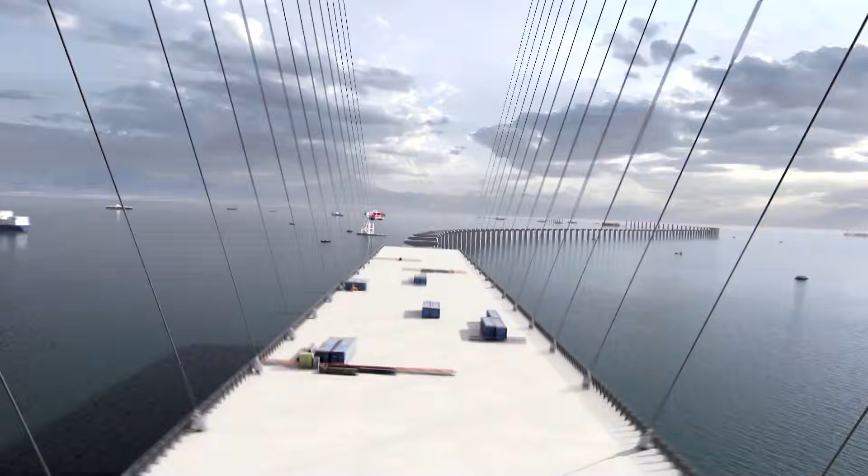In the southeast of China, one of the most audacious construction projects ever undertaken has just been completed, linking the two banks of the estuary to the northwest of Hong Kong by means of a 24-kilometer artificial sea crossing comprising bridges, artificial islands, and a 6.8-kilometer-long immersed tunnel. There are lots of challenges in the project, many bold decisions, and it is so iconic. It has become a landmark.

Begun in 2017 and completed in June 2024, the construction of the Shenzhen Link is an engineering challenge that pushes all known boundaries in this field. The unprecedented bridge span of 1,666 meters anticipates the development of maritime transport. We're offering a very wide navigation channel and a height that will allow the passage of container ships of the future. This titanic project has given this prosperous Chinese region an 8-lane highway, cutting travel time across the delta to 30 minutes, whereas in the past, it took 2 hours to drive around it.

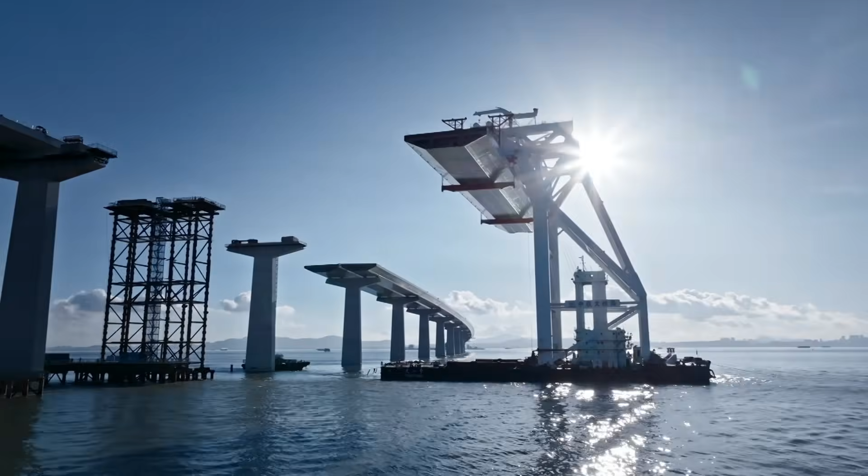What impresses me most about this project is that despite the cost it may represent, there's a structural unity from one end of the project to the other that is spectacular, magnificent, and successful. Original and exceptional designs, a quest for performance and durability, perilous transportation and assembly in a hostile environment, the construction of the Shenzhen Link has proven the skills of its builders, notching up world records in this engineering sector. So we take one of the longest immersed tunnels, one of the longest suspension bridges, and we combine that into a massive project that in itself makes it a huge challenge.

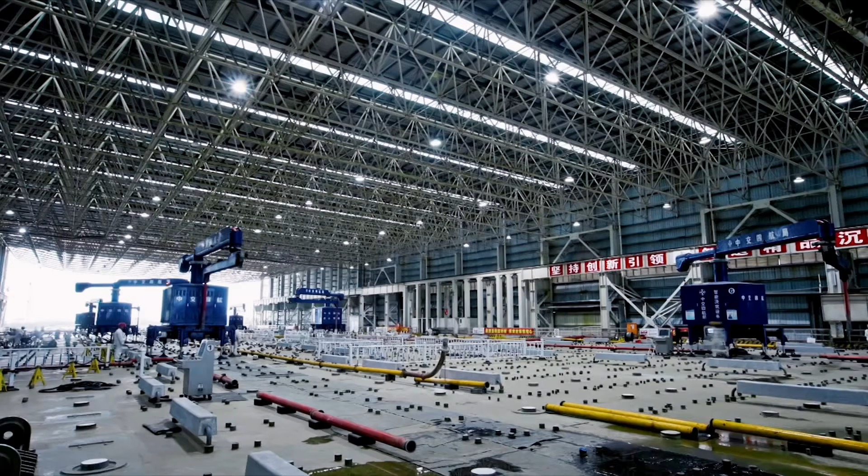For this project, the Chinese have continued to innovate, building new types of tugboats and floating cranes, coming up with designs and materials that are even more resistant to the vagaries of the weather, and building revolutionary, fully automated factories. Really, the boundaries of technology have been pushed. The high degree of automation and prefabrication, I think, will also set new standards. It is time to get on board for a spectacular story. The story of an incredible construction journey that has reshaped the landscape and the brilliant future of the Greater Bay Area and brought sea link construction into a new era.

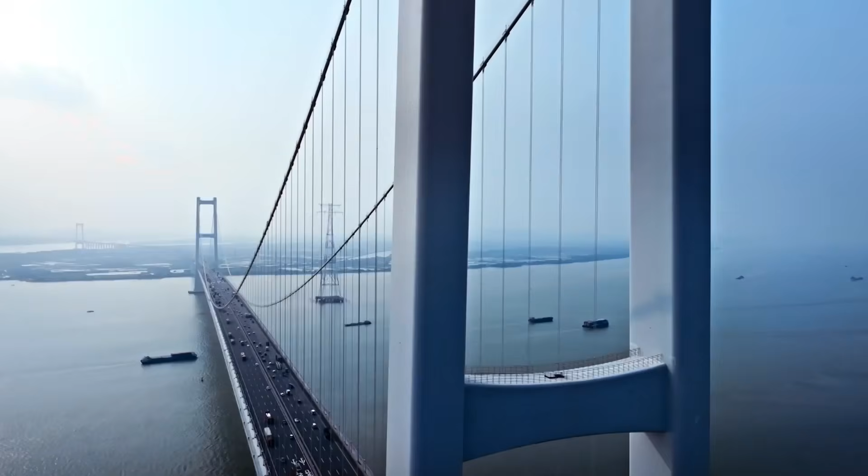The South China Sea is a large corridor through which a large part of the world's maritime trade passes. To the northwest of Hong Kong, the region bordering the Pearl River estuary has become one of the most dynamic areas in China. Most of the cutting-edge industries are grouped there, and their annual economic output is close to 1,800 billion euros, 20 times the turnover of the Silicon Valley in America. This area, known as the Guangdong-Hong Kong-Macau Greater Bay Area, has more than 80 million inhabitants and already has an extraordinary transport network made up of 4,900 kilometers of highway and 2,500 kilometers of railways, a combined distance that would connect Paris to Beijing. Added to this are 5 international airports and 3 of the largest commercial ports in the world. However, demand continues to grow for road infrastructure to enable faster crossing from one bank to the other.

This is how, in 2017, a new crazy project was initiated, connecting the cities of Shenzhen and Zhongshan by spanning the estuary using a bridge and an underwater tunnel in order to reduce the travel time between these two constantly developing cities. Thanks to this new maritime link, the journey will be 4 times faster than going around the bay by the north. Such a project, of course, can only be justified by very strong socio-economic reasons, and it was certainly supported by a strong political will to build an exceptional structure.

When the link is opened, road traffic will exceed 100,000 vehicles per day. It will be two-way and on 8 traffic lanes, which makes it one of the most ambitious challenges of all trans-maritime projects in the world. But I think in terms of ambition, it was really the time frame to construct a link of that scale, 24 kilometers, within the given time frame of 7-8 years. That's a big challenge. And building such an edifice in an aerial and aquatic environment in perpetual motion was another major challenge.

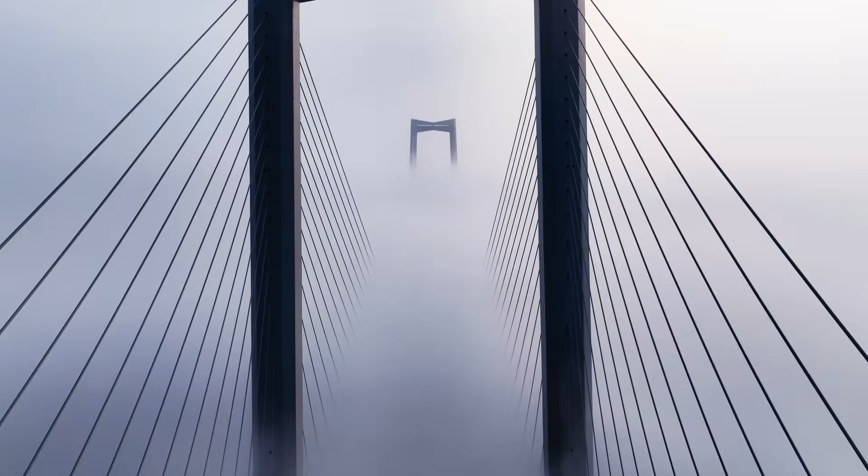From the very beginning of the project, the specialists therefore focused on analyzing and understanding the natural elements present in the estuary, the hydrometry, the river and sea currents, and of course, the winds. The typhoon winds are a major issue in these areas, so we do quite extensive testing of the structure. We actually build a model, and then we expose it to different winds and different directions to make sure that it's stable under these severe conditions. These wind tunnel tests reproduce the typhoons that regularly pass through the Greater Bay Area. The engineers therefore tested several designs and found out which is most appropriate.

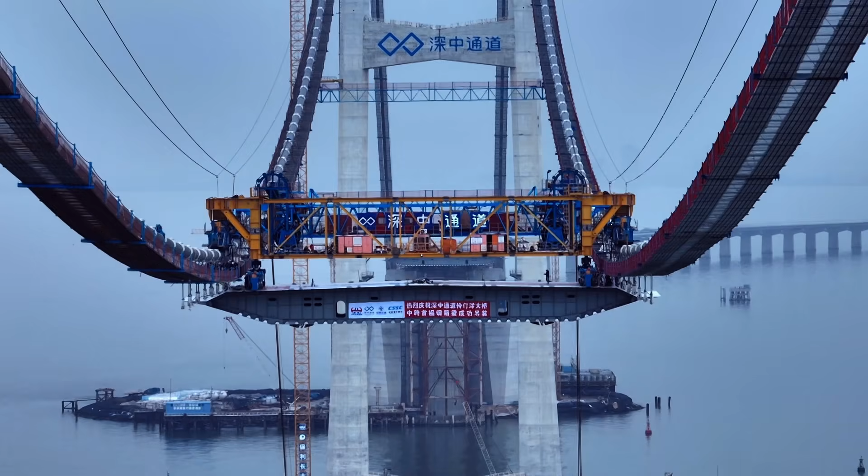It's about forming the structure in a way that the wind can flow around it to make as little resistance as possible. And we can see here that for the structure of the suspension bridge, the section was fitted with a fairly pointed nose, which is quite rare in this type of structure, and which, like an airplane wing, will allow the air to flow around the structure as smoothly as possible.

This tapered shape has significantly optimized the aerodynamics of the bridge, allowing it to withstand typhoons with winds exceeding 300 kilometers per hour. The other major challenge was the design of the submerged elements, because the Lingding-Yang, the central channel of the estuary, has a weak ocean current. The installation of a bridge tunnel over its entire width should therefore, under no circumstances, reduce this current further, at the risk of seeing sediment deposits accumulate and hindering its natural functioning.

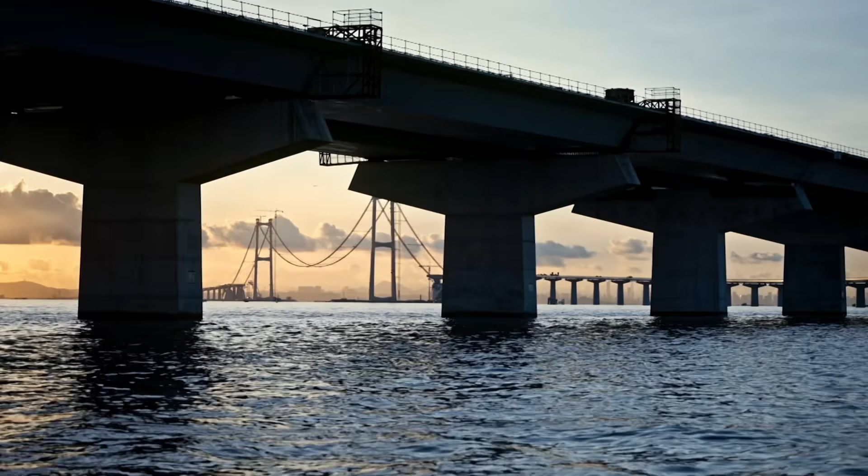Its S-shaped design is therefore not a coincidence. The reason for the winding route is mainly due to the need to design the bridge perpendicular to the water flow, which is more conducive to flood control and tidal regulation. By imagining the route of the bridge perpendicular to the direction of water flow, the obstruction generated by the bridge piers and artificial islands can be considerably minimized. And to further reduce this impact, thought has also been given to the design and shape of these elements.

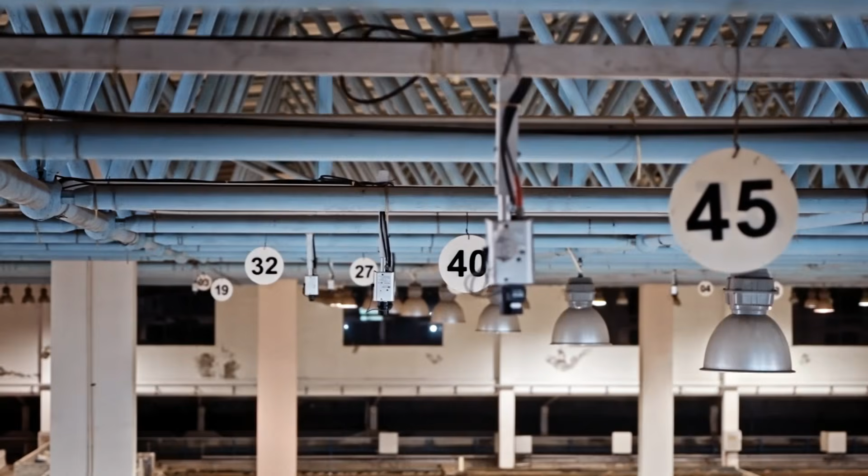To do this, Chinese engineers designed a scale model of the estuary, reconstructing the relief and currents of the Pearl River estuary over 100,000 square meters. For 2 years using models, the engineers were able to carry out hundreds of experiments like this one. This little piece of plastic is a tracer particle. We're using 40,000 of them in this experiment, and above me are 282 cameras that allow us to follow the trajectory and movement of the particles, and to study the hydrodynamic impact of the Shenzhen Bridge on the Lingding Channel.

These multiple experiments have helped to optimize the design of the bridge piers and the 137,000 square meter artificial island planned to be built right in the middle of the estuary. It was very much about coming up with shapes that are streamlined so that they will naturally have as little blockage as possible. And then you would also notice that in certain parts of the structure, there's only one pier. So even though there are two girders, they're resting on one pier instead of having two pier shafts. And that also helps to limit the water blockage.

For the West Artificial Island, which will be the entrance to the underwater tunnel, a diamond shape with curved edges was chosen. This design transforms the ocean into a sky, in which an elegant kite is floating, pointing east towards the rising sun. The concept of a kite attached to a string, rising towards the sun and chasing the light is like a poem or a painting, imbued with a great sense of harmony. This concept embodies what we believe to be an elegant masterpiece of engineering.

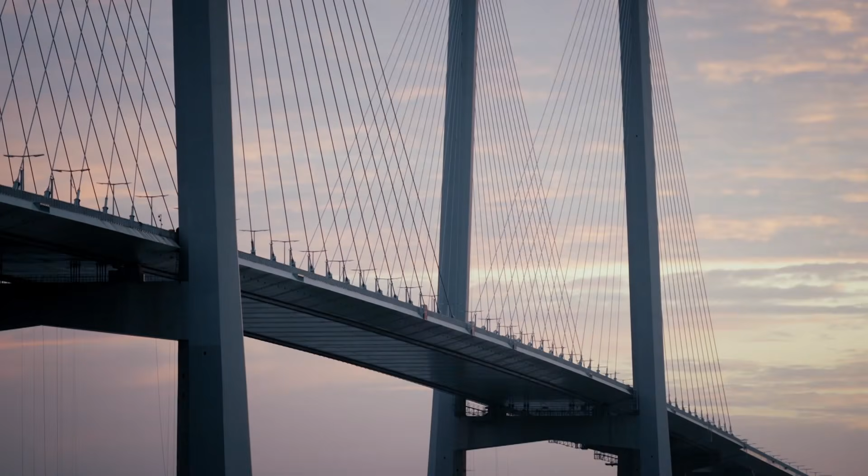Kite, it's linked to Chinese culture, but it's also, I think, a toy that a lot of people are familiar with. So in a way, it's also a universal language. There was a lot of effort put into the fact that it had to be one flow, even though it was an island, a bridge, and a tunnel. So it's more than just a transport element, but also an aesthetically pleasing element in the context where it's placed.

The first works in the estuary began in May 2017. The countdown had begun because the Chinese engineers set themselves the goal of completing this 24-kilometer maritime link in just 7 years. 7 years to construct a link of this scale is certainly ambitious and a huge challenge. But on the other hand, Chinese are very good at implementing at speed.

Within less than 2,500 days, they will have to build a cable-stayed bridge, simple bridges called approach bridges, a suspension bridge, 2 artificial islands, and an underwater tunnel almost 7 kilometers long due to the proximity of Shenzhen International Airport, whose intense air traffic prohibits the construction of any high buildings. A titanic challenge that must also combine lightness and long-lasting performance. Lightness and durability are not incompatible. They are even complementary, as long as you choose the right materials in the right place.

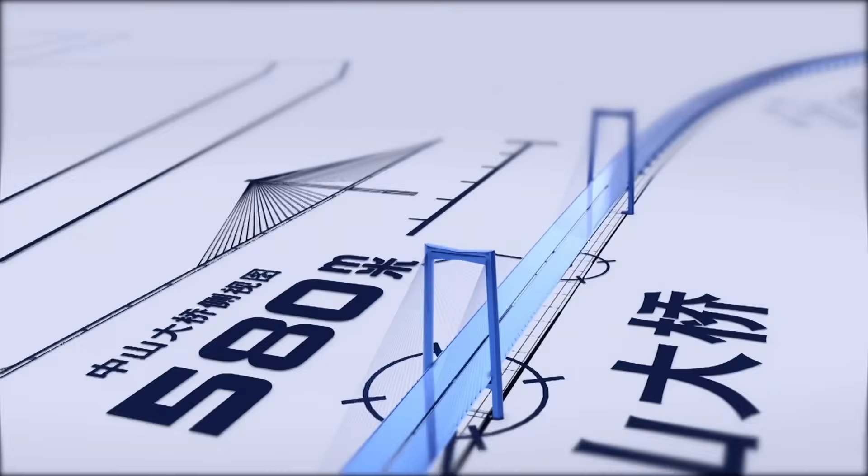One of the approach bridges, located between the cable-stayed bridge and the suspension bridge, is 13 kilometers long. It is supported by more than 120 concrete piers, firmly anchored in the estuary and spaced as far apart as possible so as not to obstruct the current. As a result, the engineers had to design long deck spans that were both rigid and lightweight. And to do this, they had to use the most suitable material, steel.

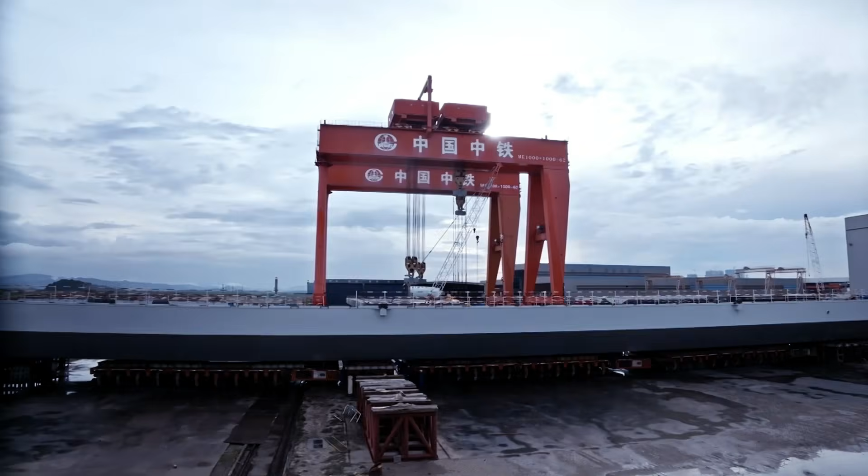In just 2 years, nearly 100,000 tons of steel box girders were manufactured in this ultra-modern factory built specifically for the project. From cutting the plates to welding, everything is automated. I think you can rely on a much better quality with an automated process, and you can also obtain speed and repetitiveness to a higher degree.

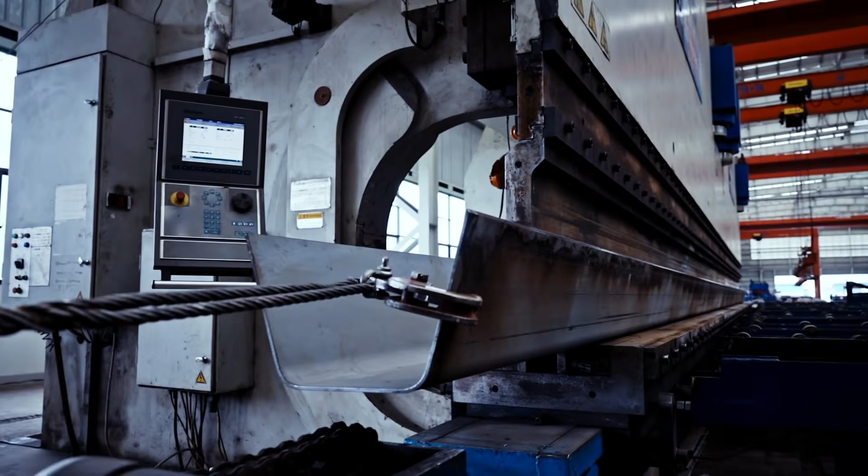The box girders, which will have to support the weight of the cars, attain their rigidity thanks to the U-shaped metal reinforcements. However, the structure remains very open, which keeps it light. For this project, the assembly method was enhanced with a technological innovation consisting of welding these reinforcements from the inside in a space barely larger than a volleyball, a world first made possible thanks to this new robot.

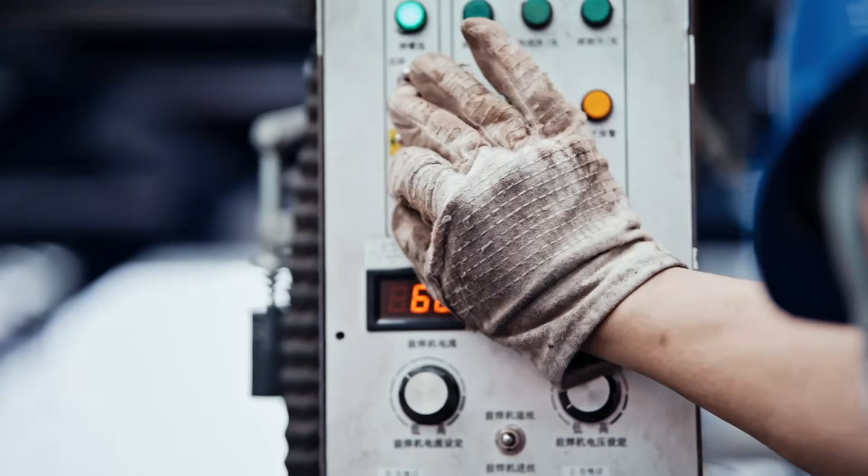Traditionally, it has only been possible to weld from the outside, so as you can imagine, it leaves the potential for a little gap on the inside. It will ultimately mean that the material will break in fatigue, as we call it. By welding from the inside, the quality of that little detail is actually improved quite a lot. So this technology is definitely an innovation and a leap forward that we will take a lot of inspiration from in other projects.

Once assembled, each box girder is more than 100 meters long and weighs 1,500 tons. But once it leaves the factory, how can this imposing structure be transported? And how will it be hoisted onto the bridge piers right in the middle of the estuary? The answer is called Sky One, a crane ship 84 meters high with the largest lifting capacity in Asia, because it can lift up to 3,600 tons, the weight of 80 semi-trailers.

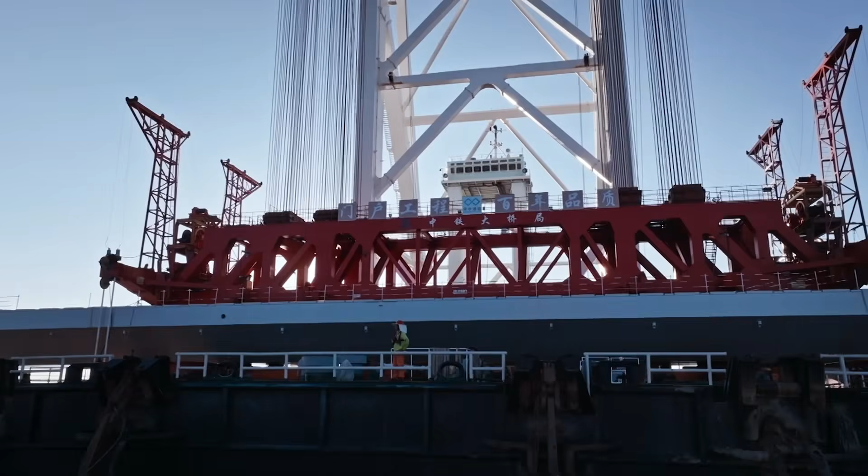Sky One should cross the Lingdingyang Canal in 20 minutes. I'll report back to you. Okay, understood. The Sky One is a ship that can both transport elements weighing several thousand tons and put them in place without any problem, with the required precision.

In record time, this floating forklift reaches the steel box girder's final location. The pilots have to demonstrate great dexterity as they approach the bridge. If the wind and the current are going in the same direction, the ship is in great danger. It could very easily drift out of the canal and hit the bridge. Now that all the piers and the first decks have been installed, any collision would be extremely dangerous.

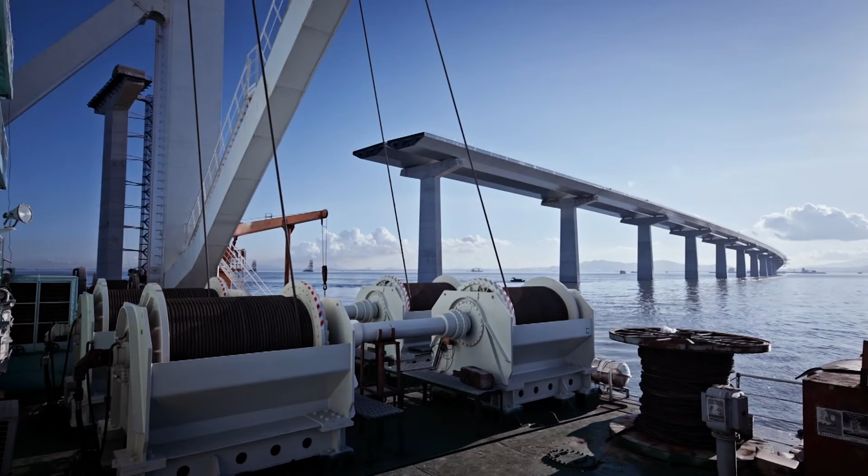The Sky One can lift the box girder up smoothly to about 60 meters. The problem is that at this point, the bridge deck peaks at 61 meters above sea level. To successfully complete this assembly, the engineers are counting on their most formidable enemy, which then becomes their best ally, the tide. In the middle and at the beginning of each month, we will take advantage of the maximum tide level to install the highest girders.

At high tide, the Sky One goes into action. Despite the wind and waves that disrupt the maneuver, the box girder comes to rest, slowly but surely, on the bridge piers. It will then be welded to the previous elements. In less than 2 years, this crane ship will have completed the assembly of all the box girders of the main approach bridge of the Shenzhen Link. An amazing feat of efficiency and speed.

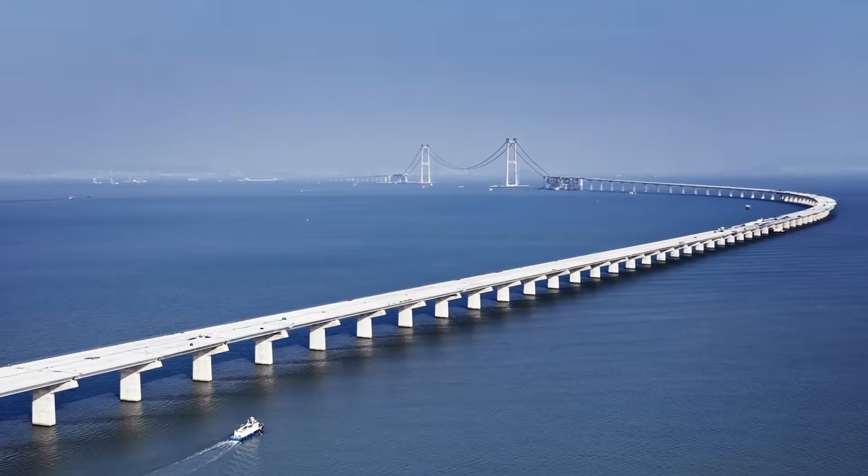Generally speaking, planning is very important for builders around the world. As far as the Chinese are concerned, it's certain that there's a question of honor on top of it all. Everything is excessive in this cross-sea highway project. The Shenzhen Zhongshan suspension bridge is a perfect example. It is planned to be the highest in the world, reaching 76.5 meters above the water, the equivalent of a 26-story building or 2 ocean liners like the Titanic stacked on top of each other.

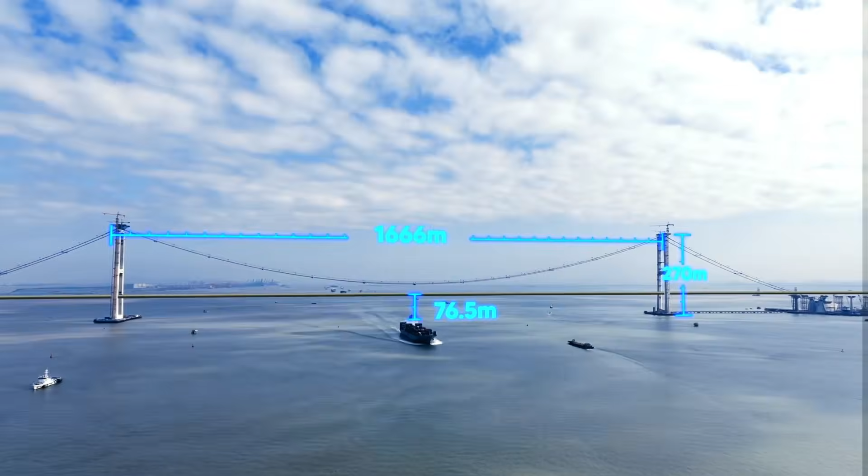The bridge will also be the world's largest span steel box girder suspension bridge in the sea, measuring 1,666 meters long. But these extraordinary dimensions are not just the whims of an engineer. The Shenzhen Link is located in one of the busiest areas for global maritime trade and is designed to last a minimum of 100 years.

In view of the development of maritime transport, with a width of 1,666 meters, we offer a very wide navigation channel. And why did we choose this height under the deck? Because we studied the trend of ship development over the next 50 years, and we've planned enough clearance heights to allow the container ships of the future to pass through.

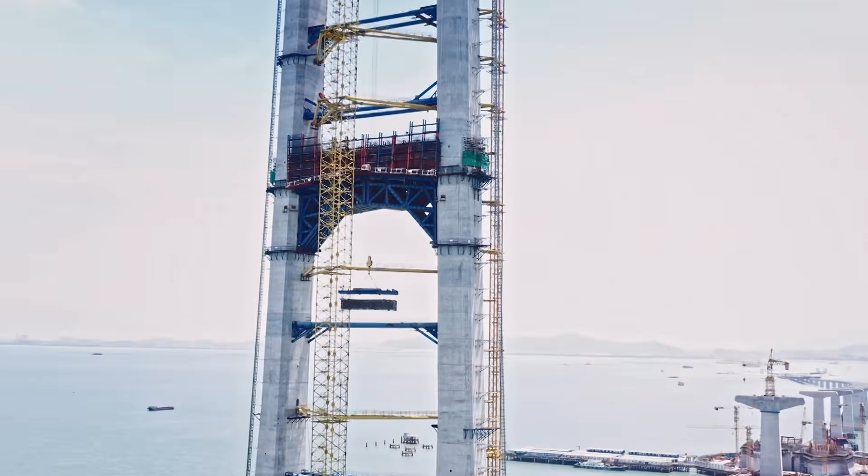To achieve this amount of clearance under the suspension bridge, the main towers that support the cables must be 270 meters high. A new challenge for the builders, who have once again custom-developed a construction machine capable of achieving this feat. Directly installed on-site, this circular micro-factory built the towers, floor after floor, rising with them throughout the process. For each tower, 48 operations were enough to pour 50,000 cubic meters of concrete onto 7,400 tons of prefabricated steel reinforcements. This is how the 270-meter towers were completed in barely a year of work.

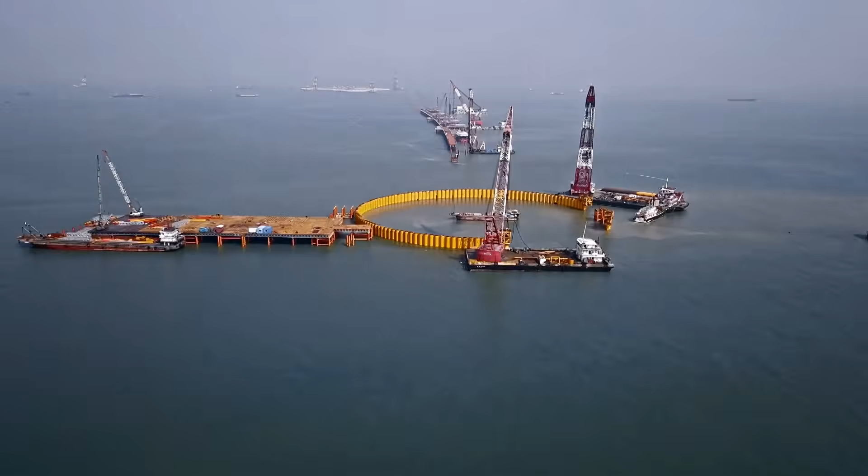At the same time, 580 meters from each of the towers, 2 underwater anchors made of reinforced concrete were built to accommodate the ends of the 2 cables that will support the load of the bridge. In this case, they weigh 1 million tons, and that doesn't surprise me at all, since they have to withstand this phenomenal force generated by the cable. These are real buildings. In fact, they're the most important buildings in the bridge. Without the anchor blocks, there's no suspension bridge.

Even before the weight of the vehicles is added, the body of the suspension bridge alone will weigh 85,000 tons, a load that these colossal anchors, the largest in the world, can easily support. But the cables themselves must be able to withstand such tension.

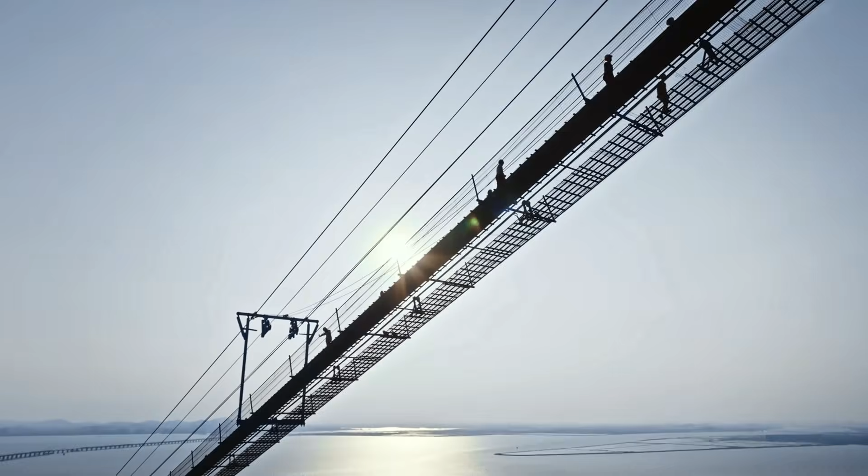And while the word cable is quite simply used, it's actually a much more complex assembly. The basic element is a 6mm diameter steel wire that is then combined into what we call a strand. And a number of these strand cables then make up the entire cable that is then compacted and made into a round cable. The entire success of the project, therefore, lies in the design of the 25,000 steel wires that make up each cable, and which is the result of 3 years of research and development.

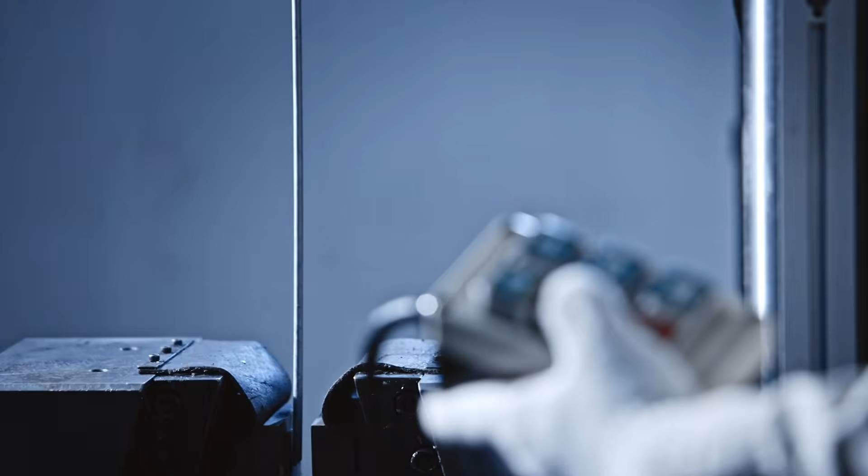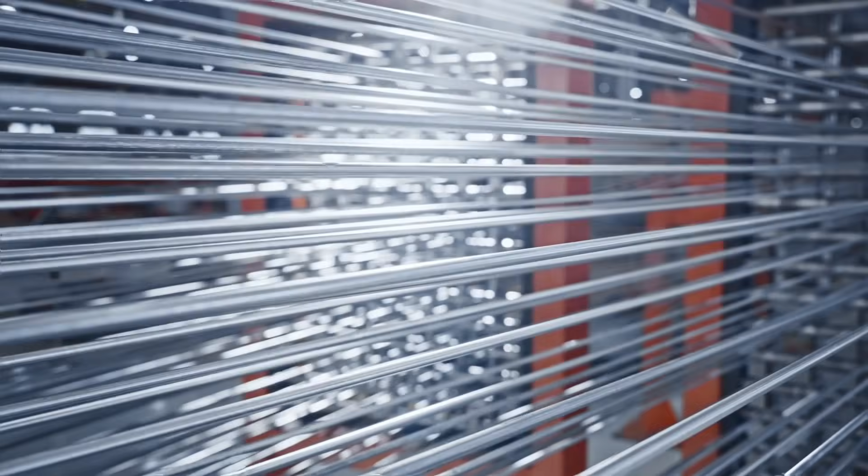To make ultra-strong steel wire, workers perform 9 successive cold drawing operations, a passage through a series of presses and gears that stretch the wire and reduce its diameter from 13 millimeters to just 6 millimeters at the end of the line. And as surprising as it may seem, a wire that has been reduced in this way will be much stronger than the original larger wire. This is because the stretching has reorganized the steel crystals inside the wire into a much stronger assembly. It's hard to explain, but it's a fact. When you pull on steel and torture it, well, it becomes better.

By carrying out laboratory tests in an atmosphere typical of that of the estuary, the engineers very quickly realized that this steel wire, although reinforced by cold drawing, wouldn't quite meet the durability requirements of this extraordinary project because the coating traditionally used, an alloy of zinc and aluminium, is sensitive to corrosion.

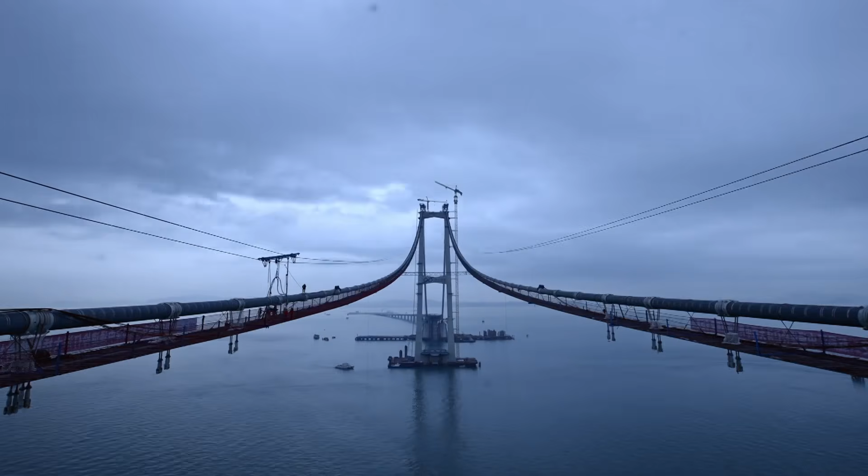The location of the Shenzhen Link is a very harsh environment. It's hot, it's humid, there's a lot of salinity in the air. So therefore, there was a lot of focus on the coating on the individual steel wires and testing to make sure that it could actually live up to the requirements.

To prevent the steel wire from rusting too quickly, the engineers enhanced the zinc-aluminium coating with magnesium, a metal that's more resistant to corrosion. This technological innovation increases the durability of the steel wires by 50%, an added guarantee to ensure that the cable will last at least a century in the harsh environment of the Pearl River estuary.

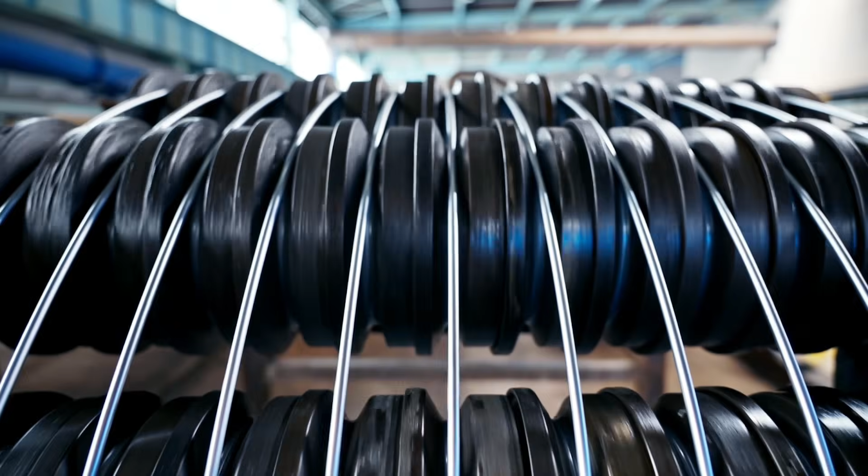Coated with their zinc-aluminium-magnesium alloy, the steel wires are then assembled in the factory to form strands. Rolled up into 3-kilometer-long coils, they are transported to the construction site, then rolled out from one end of the suspension bridge to the other, and anchored independently of each other in the splay chambers of the anchor blocks. So the breaking of one strand would have no impact on the strength of the structure, but I don't think it'll ever happen.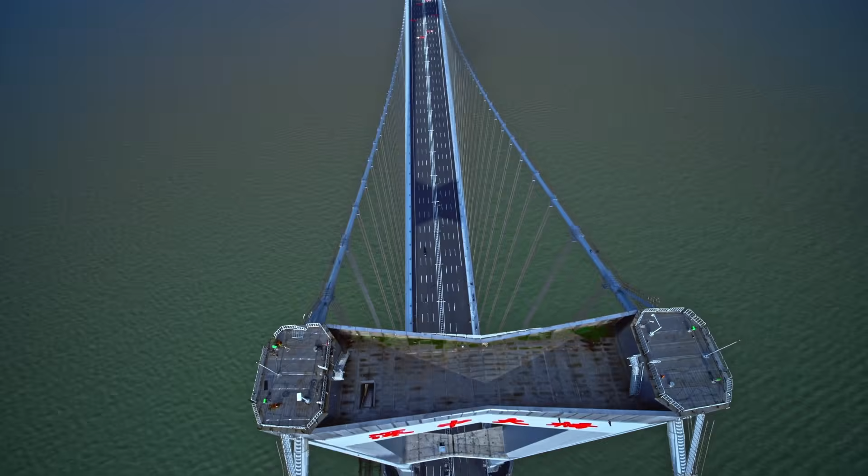This is how, starting with a simple 6mm diameter steel wire placed in the center of a 127-wire strand, a main cable composed of 199 strands is formed. With a total diameter of 1 meter, each of the bridge's 2 cables will be able to support a load of 150,000 tons, the equivalent of the weight of 5,000 humpback whales.

Their first mission will be to help position the steel box girders that will form the deck of the suspension bridge. A crane has been installed astride the 2 cables of the bridge, and the very first girder is about to be put into place 91 meters above sea level. Checking complete. Start hoisting. Okay. 3, 2, 1, lift. The section is now starting to take off.

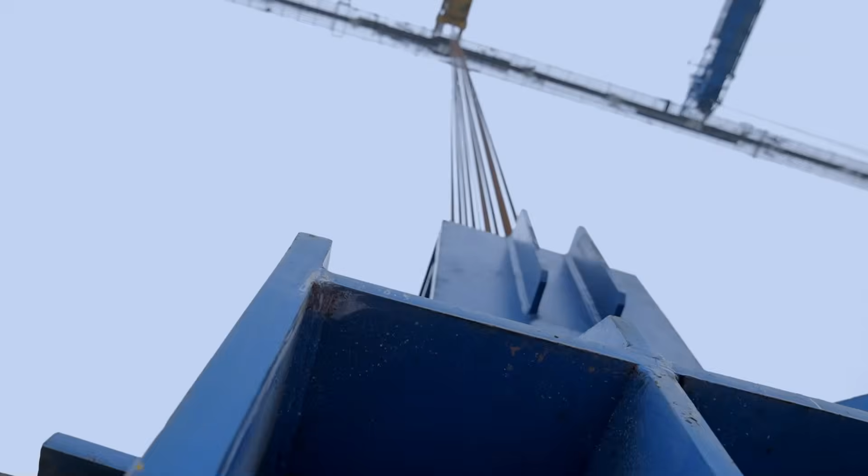Each box girder is about 10 meters long and weighs 226 tons, the weight of 150 cars. Despite some wobbling, the very first section of the bridge is slowly making its way to its location. The girders are hoisted from barges up to the final position, and then they are connected by means of hangers. So a vertical element that connects the main cable to the girder.

In the space of a few months, more than 200 beams will be suspended from the 2 main cables, then welded together. The state of the art is that we have a fully welded box girder from one end to the other end, as from anchor block to anchor block.

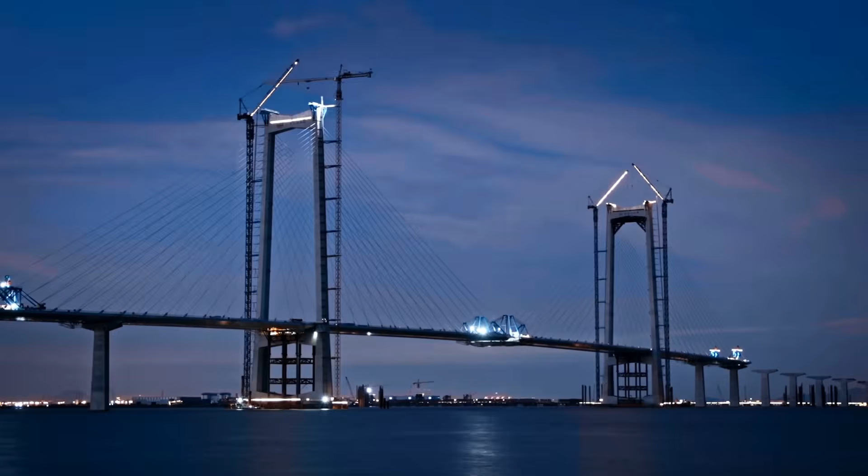So it's actually fully continuous over more than 2.5 kilometers in this case. All the other sections of the Maritime Link were also welded together or connected by expansion joints, forming a continuous and uniform track 17 kilometers long.

A future 8-lane highway with a total surface area of 380,000 square meters that has been covered with a very specific surfacing. An asphalt enriched with epoxy, a waterproofing resin that will protect the metal structure of the bridge while guaranteeing great driving comfort for the 100,000 users expected each day. Their comfort and safety are obviously a priority.

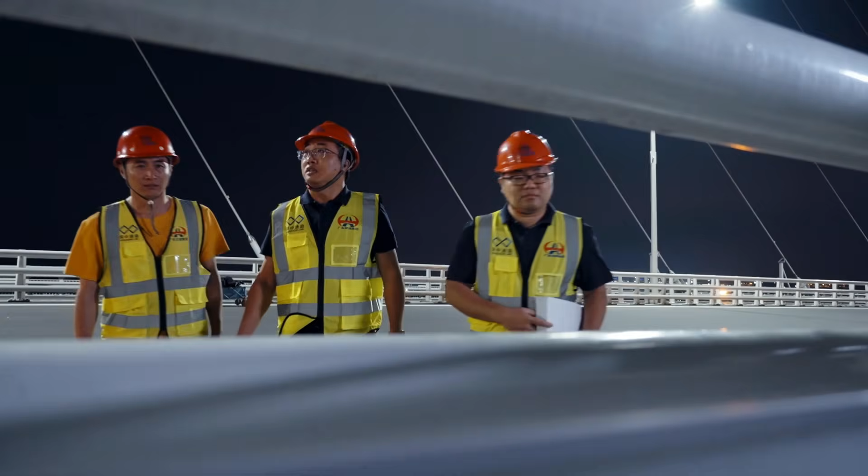From this point of view, artificial light will also play a predominant role at nightfall. Because although the primary intention of the lighting is to aesthetically highlight the contours of the structural elements of this suspension bridge, its floodlights should not, under any circumstances, interfere with driving. An initial lighting system, deemed too dazzling, was dismantled only a few days after its installation. But today, the teams are putting things right.

We've now changed for lighting in an upwards direction. The lights are installed on the side of the guardrail, creating a light curtain from bottom to top that effectively avoids the glare problem for drivers. The installation is complete, and we will now be able to discover the final effect.

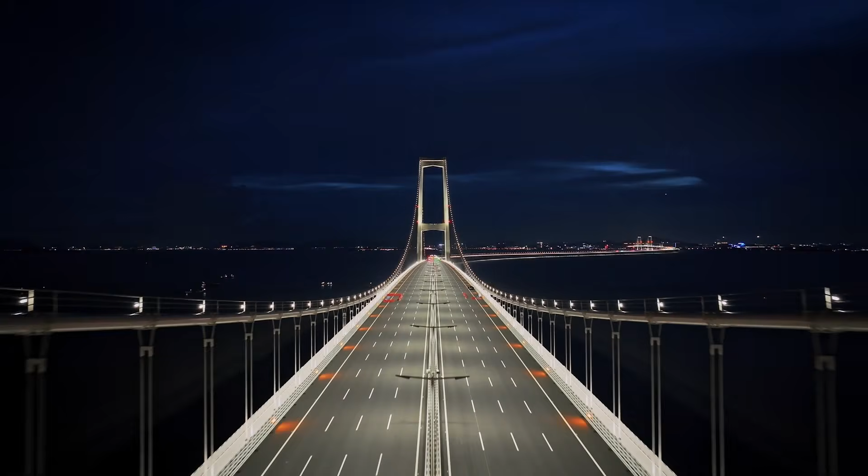For the very first time, the suspension bridge is standing out in the night. And with it, the entire Maritime Link is illuminated. All the elements come together to form one unique link, a resplendent 17-kilometer structure that seems to float above the water and majestically meanders through the estuary. At its end, the artificial island mysteriously interrupts this luminous furrow.

Sparkling, this kite is the gateway to what is undoubtedly the most impressive and complex architectural feat of this cross-sea link. An 8-lane, 6.8-kilometer-long underwater tunnel that leads to the eastern shore of the Great Bay. To understand how such a structure came to life, we need to go back 7 years.

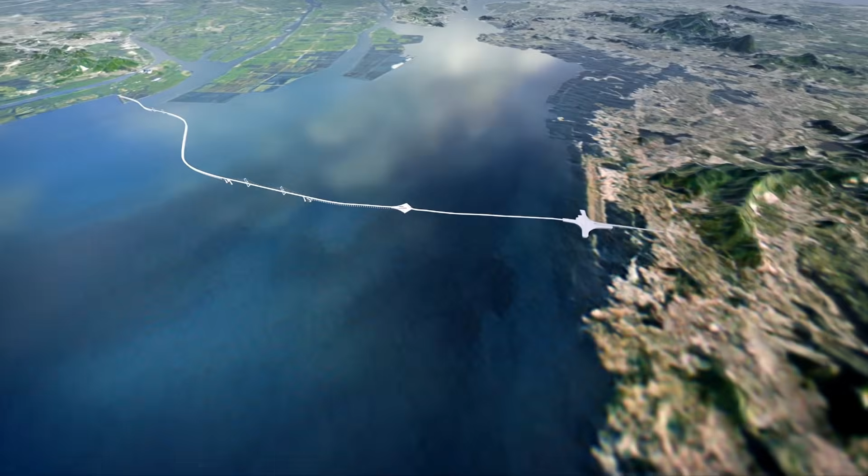The Shenzhong Link connects Zhongshan on the west side with Shenzhen on the east side. And the point where the link connects to land on the Shenzhen side is very close to the airport. And therefore there were quite strict height restrictions on the structures at that location. And therefore the tunnel is the logical response to that constraint.

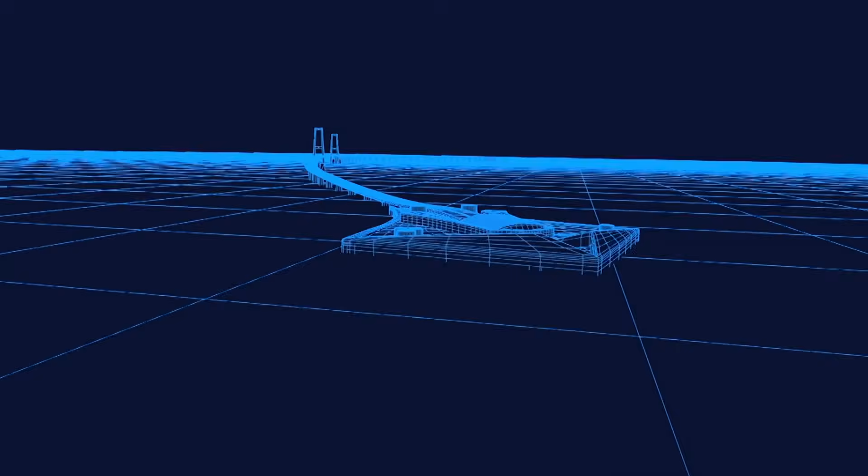At the same time, the shipping channel has been completely freed up. There's no pier, there's no bridge, there's no risk of a boat hitting something, and that's also very important. 2 islands were designed by the architects to accommodate the entrances and exits of this underwater highway. The artificial island in the west, which will also house the tunnel's ventilation infrastructure and its control center, is the first structure to have been built.

And then, of course, the construction challenge is that you have to construct an island on this estuary mud that is there, and this is a difficult thing to work with. Moreover, building a stable island in a constantly moving aquatic environment is a structural challenge. To achieve this, the engineers chose what's known as the coffer dam technique.

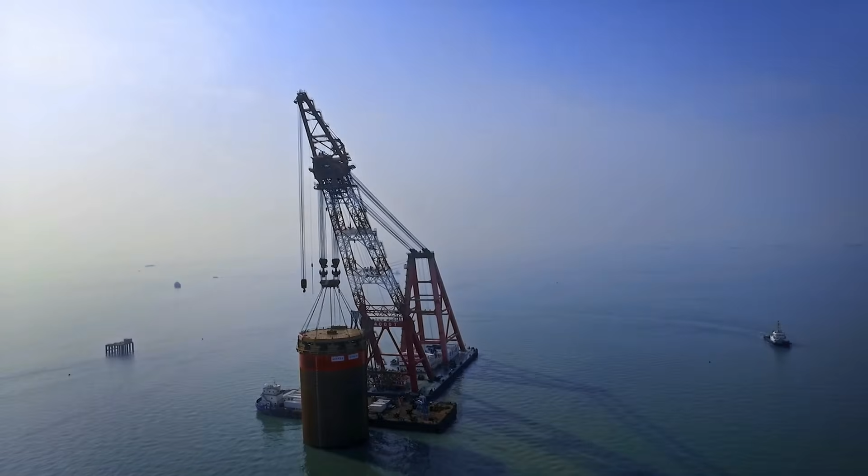For the artificial island, we're starting from scratch. We're building an enclosure that we can drain, and in which we can work as if we were on dry land. This artificial enclosure is, in this case, made up of metal tubes driven into the ground against each other. At the start of the work, in May 2017, the goal was to waste as little time as possible so as not to hold up navigation in the estuary for too long.

So the larger the cylinders, the fewer will be needed to form the base of the island. The manufacturing plant started working on 57 cylinders with a diameter of 28 meters and a weight of 650 tons. A new world record for these construction elements.

The main problem with the large diameter cylinders used here is that they have to be driven into the ground. So you need to have metal tubes that are strong enough. But it's a good technique because it's ultimately part of the final structure that will withstand the sea, the effects of the swell, and many other things.

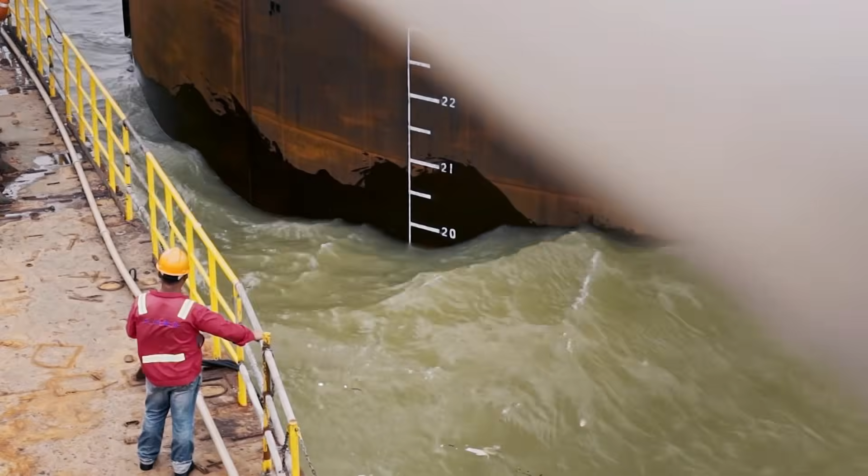To drive the cylinders into the ground, an imposing system of hydraulic vibrating hammers was used to sink the tubes, exerting a pressure of 6,000 tons on them. But there's a problem. The seabed has particularly hard intermediate layers at this precise location. Forcibly driving in the cylinder could lead to multiple deformations and a very unstable installation of the structure. The technique, therefore, requires further adaptation.

This is one of our characteristics, us Chinese. We are constantly adapting and developing our techniques based on what already exists. Now, wherever steel cylinders need to be driven, whether the ground is hard or soft, our new process guarantees success.

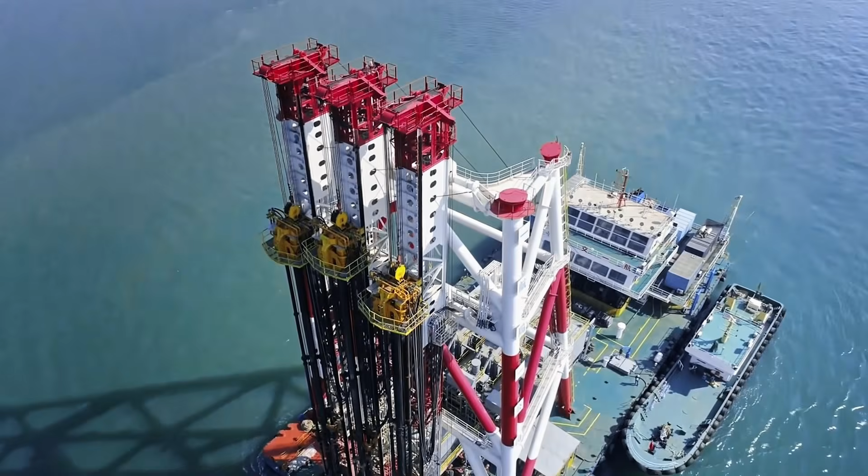The innovation is a method called penetration assisted by deep soil mixing. Drills are used upstream of the cylinder installation. They will help transform all these diverse layers, hard and soft, into a sort of plasticine clay with a relatively uniform consistency. This homogeneous seabed will thus be able to accommodate the cylinder and ensure that it is firm and perfectly straight.

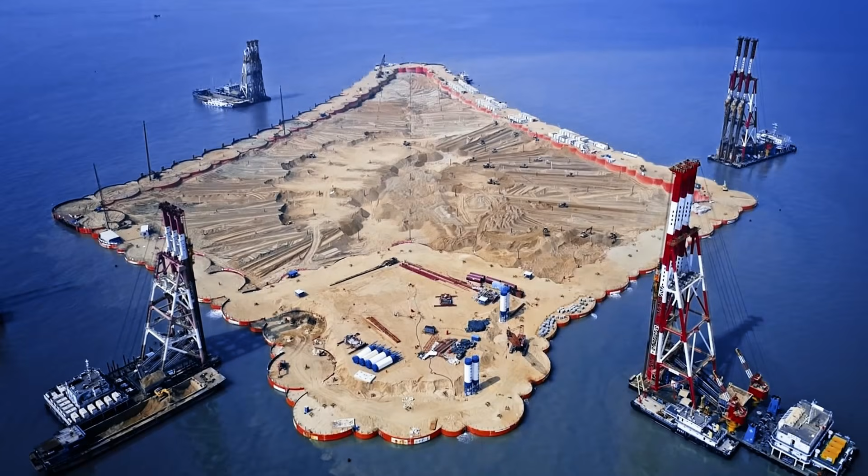Thanks to this method and the limited number of cylinders, it only took 4.5 months to complete the enclosure structure. Once the central part was filled, the island had a solid base of 137,000 square meters, the surface area of 19 football fields. 4 years later, the sand has given way to concrete and the first amenities, while nearby, underwater, the future underwater tunnel's outline has begun to take shape.

Before installing an immersed tunnel, it is necessary to dig out or to excavate a trench. And then a gravel bed will be placed at the bottom of the trench. And this is because it needs a very even support so that there are no undesirable bending effects or stresses at one corner of the tunnel element.

This tunnel bed will have to be 5 kilometers long and 330 meters wide. To excavate this deep water trench, 300,000 cubic meters of rock will have to be moved. As long as the rock is very friable, decomposed granite, everything is fine. But often, the digging teams are stopped dead in their tracks.

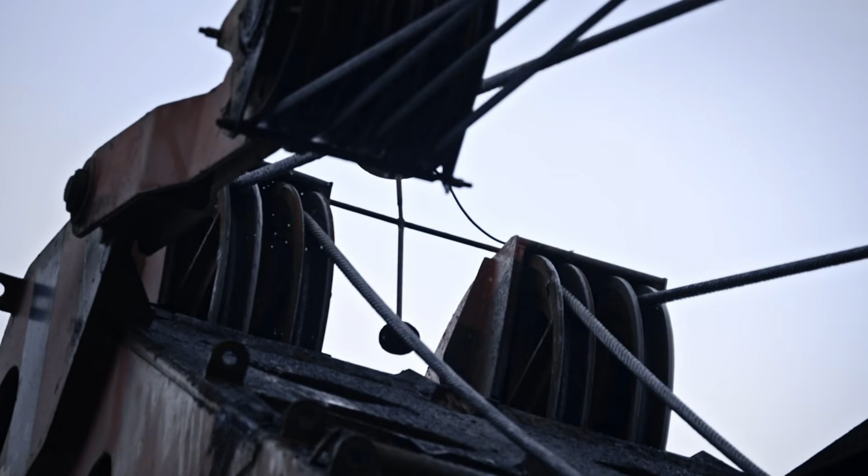We've hit an area of the northern trench where we can't dig any further. What is the exact location according to the measurements? There, between 30 and 40 meters, there's a 3-meter gap. We'll have to move on to the rock drilling process.

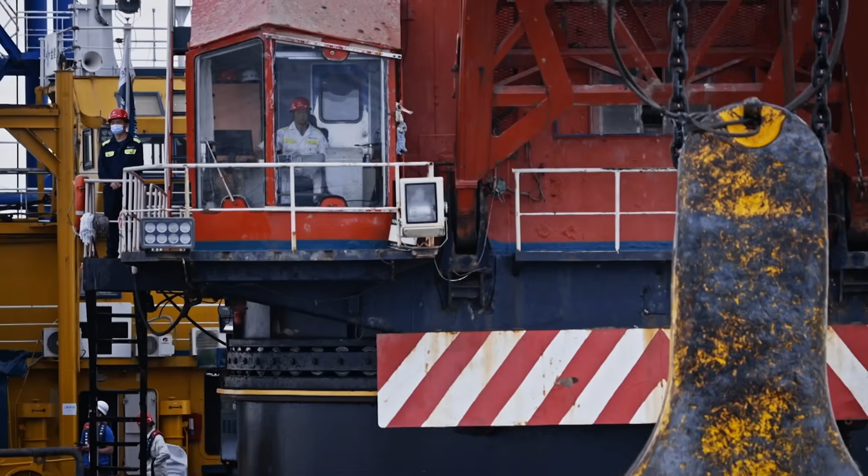This type of drilling is usually done by blasting, a technique that the engineers immediately ruled out in this case. For a simple reason, the Lingding Channel is a migration route for Chinese white dolphins, an endemic species that could be endangered by underwater explosions. The most recalcitrant rocks will therefore be drilled using a 35-ton rock hammer submerged in free fall at a speed of 20 meters per second.

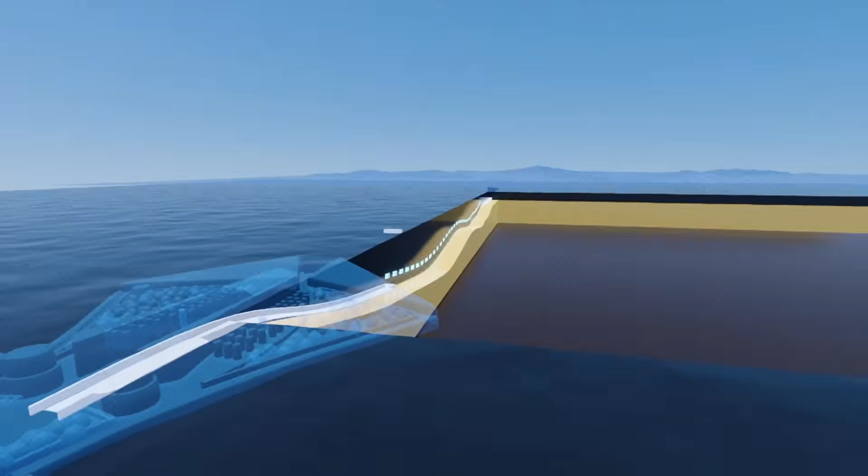To process 1 square meter of rock, it would probably have taken 4 kilos of explosives. With this rock drilling process, it only takes 2 to 3 hammer operations for the same area. More than 4 years of work and thousands of rock drilling operations like this one were necessary to prepare the tunnel bed. A bed on which a perfectly even mattress must now be laid, upon which the 32 tunnel sections will be safely placed. This is where the Jinping No. 2, the world's largest gravel leveling vessel, comes into play.

The Jinping No. 2 is effectively a floating factory, which allows you to get into the right position at sea, to work at great depth in a fixed and stable manner, since the four legs are telescopic and can be adjusted to a seabed that could have any shape. And it allows the part of the ship that is floating to be lifted and to become independent. Firmly anchored and isolated from the wind, currents, and tides, the ship can thus work in complete stability.

For each of the 32 tunnel sections, this underwater 3D printer will fill the trench with 10,000 cubic meters of gravel, the equivalent of 4 Olympic swimming pools. The gravel is projected towards the bottom at a frantic rate of 800 cubic meters per hour, then leveled by compaction.

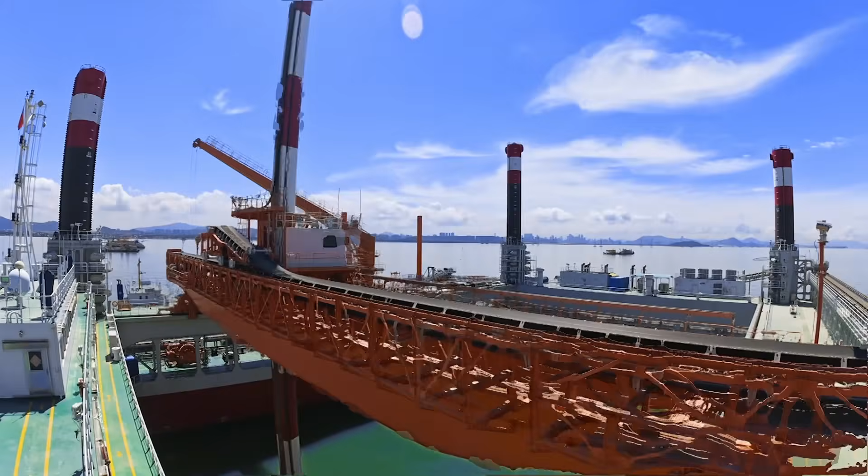This barge is a concentrate of technology, in the sense that it's equipped with a trolley that moves a dipping tube that's set to the desired altitude by laser, which deposits the gravel in strips that will serve as a receiving mattress for the tunnel elements to be laid.

The leveling is carried out with such regularity that the deviations in height never exceed 4 centimeters. A precision that guarantees that the tunnel will be assembled on a perfectly flat base. Thanks to this technological monster, it took less than 130 days of work to prepare the 5 kilometers of trench. The mattress is therefore ready to receive the sections of the future underwater highway.

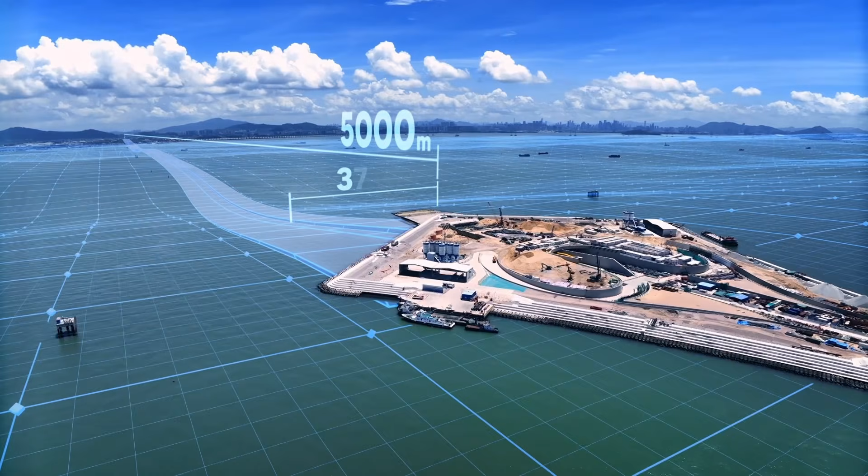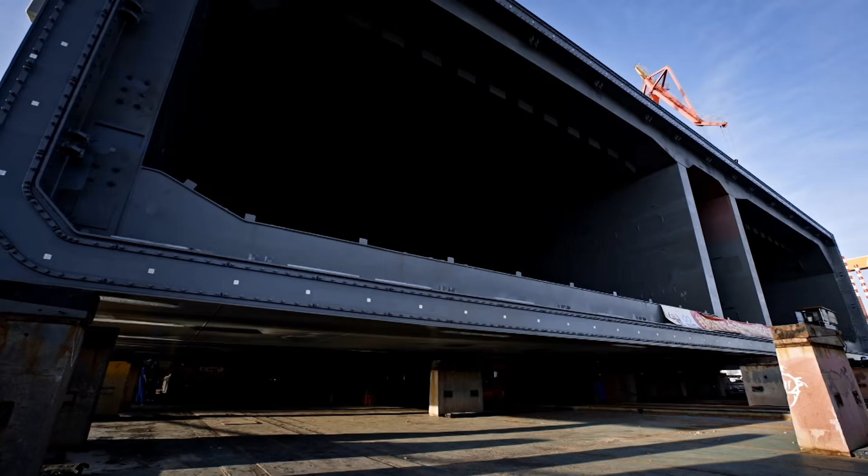A few kilometers away from the construction site, the largest robotic factory in the world was built with the sole mission of manufacturing the 32 tunnel sections, because the technique chosen is quite unusual. It will combine concrete commonly used for this type of structure with steel. And the reason for this is the exceptional width of the tunnel, 46 meters, a world first.

The link carries 8 traffic lanes, 4 in each direction. That is quite a lot, and for an immersed tunnel, it is pushing the boundaries. And if something special is not done, then the top slab would deflect. So it was ultimately decided that the concrete steel sandwich solution was the best answer to the challenges.

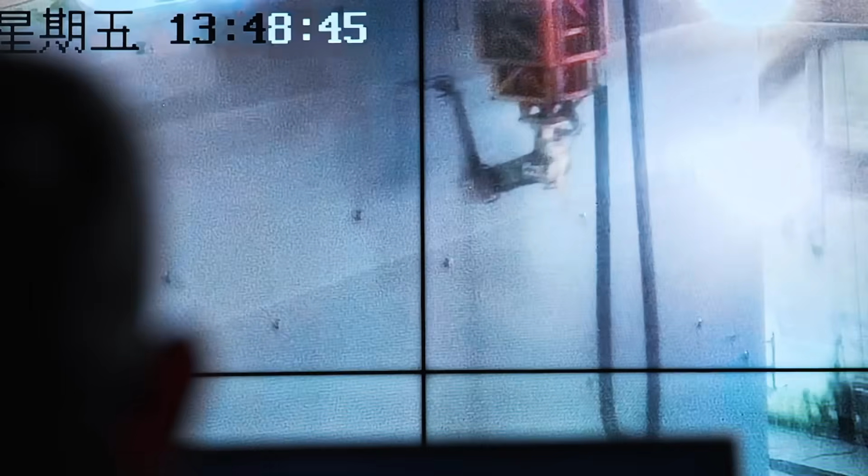Indeed, the wider the tunnel becomes, the more its weight and bearing surface increase. It then becomes more fragile and risks distortion under the weight and pressure of the water. To avoid deformation of the structure and attain better rigidity, the engineers chose to use steel plates, at least 40 millimeters thick, on the internal and external faces of the shell, which they will then fill with concrete.

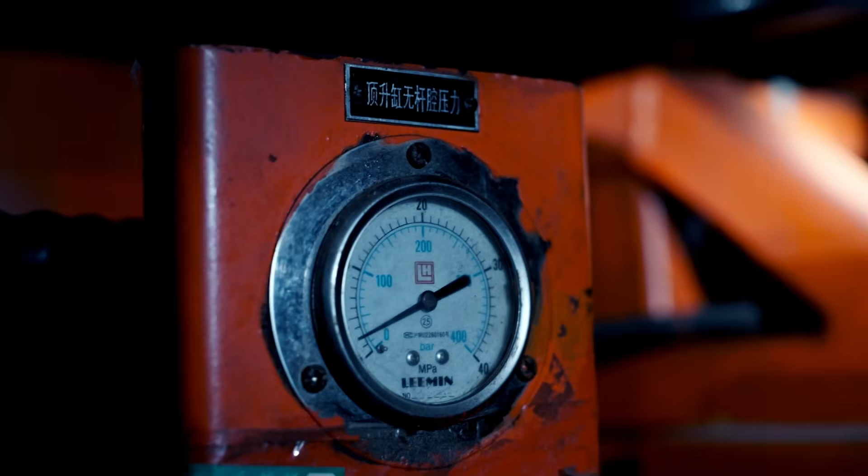Once assembled, each section is 165 meters long and 46 meters wide, with a surface area of 7,600 square meters, equivalent to 18 basketball courts. As tall as a 3-story building, it measures 10.60 meters, and its shell is made of more than 10,000 tons of steel. But there's a problem.

The marine environment represents a worrying threat for a metal structure like this, because seawater, rich in salt and oxygen, is very corrosive. The engineers had to adapt once again to this constraint. In order to avoid corrosion of the element you don't want to corrode, you put what we call a sacrificial anode in. So when the corrosion happens, it happens on your sacrificial anode rather than on the structure you have put in the water. Each tunnel section is thus protected by 552 of these metal blocks, welded to the structure, whose role is to attract corrosion before it damages the tunnel walls.

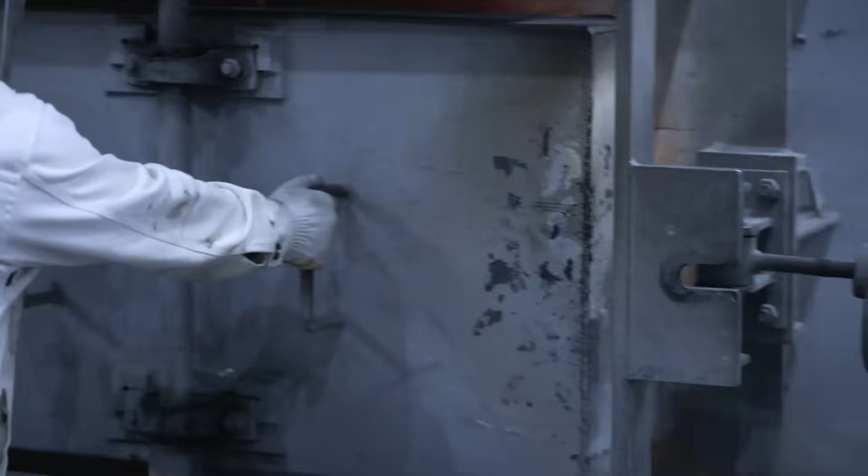For this project, the Chinese engineers chose to manufacture these elements with an aluminum alloy that increases their lifespan by 50% compared to previous models. Enough to protect the tunnel for a long time. In total, 20,000 of these sacrificial anodes will be produced to cover the 5 kilometers of the submerged structure. Equipped in this way, a section weighs around 12,000 tons.

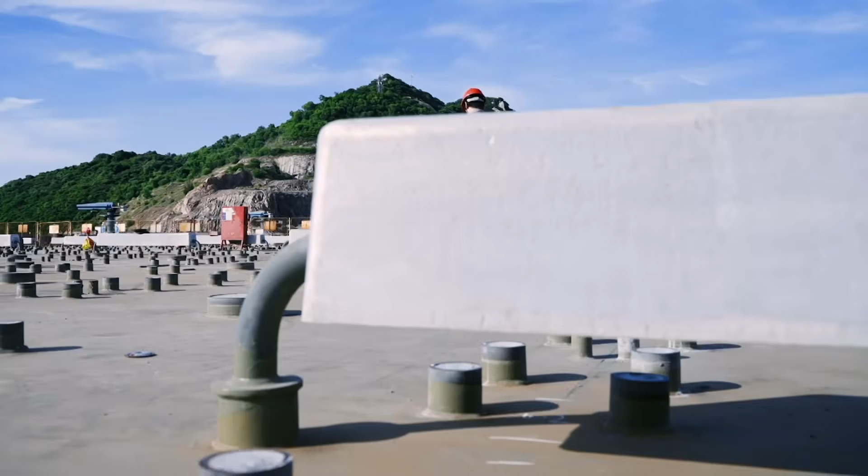However, it is far from having reached its final weight, because at this stage, the metal structure is in reality only an empty shell and potentially deformable. Before being submerged, it must therefore be filled with a very specific concrete. I think the main problem is to avoid air entrapment in corners inside, to make sure that the whole volume is filled with concrete. Because it's basically an area that nobody will be able to inspect afterwards.

A section has 2,255 compartments to fill. As soon as the concrete is poured, the result is irreversible. There is no room for error, because if the concrete is too thick or too quick to solidify, some compartments may not be filled correctly, weakening the entire structure.

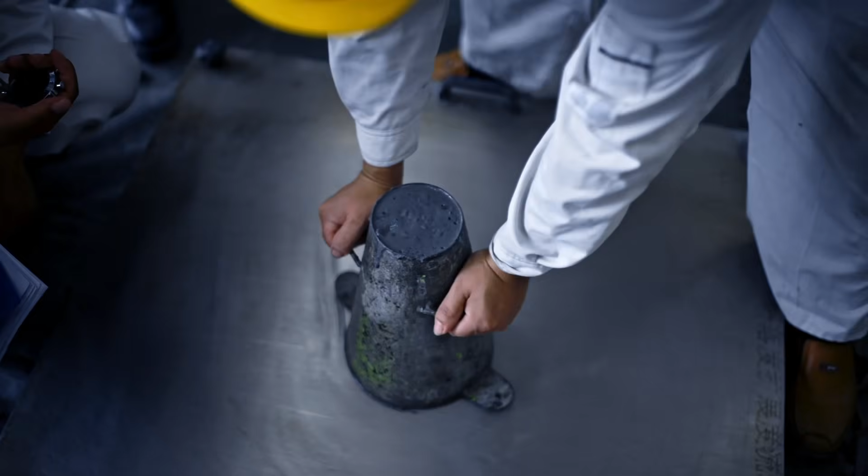And there were really a lot of tests carried out to come up with the right recipe, the right mix for the concrete, because it has to flow easily to fill all the voids. Of course, it also needs to be capable of developing the necessary strength. And then it has to be self-compacting. More than 1 million cubic meters of concrete will be required to meet the needs of the 32 sections and 5.5 kilometers of submerged tunnel.

Injecting the mixture manually is obviously out of the question, especially since to avoid premature solidification, the concrete must be poured within 90 minutes of leaving the mixing station. A new race against time begins, and once again, a robot will take up the challenge.

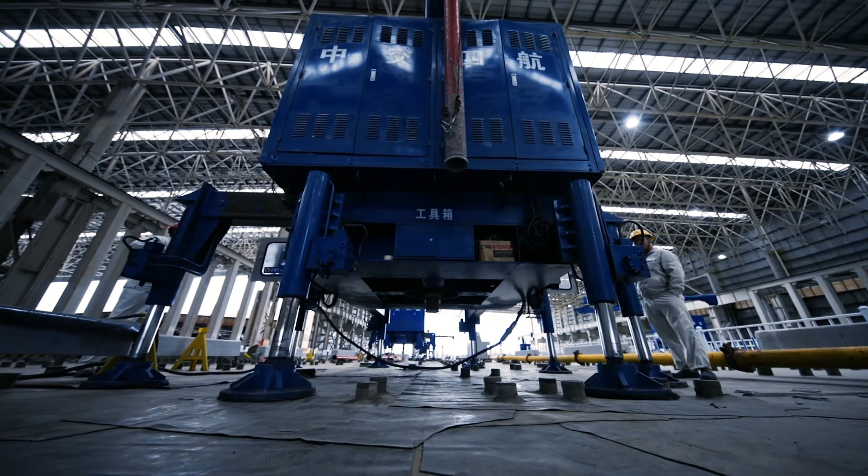What was impressive is that this concrete filling was done using a machine specially designed for this purpose, which looks like a giant spider, and has the remarkable property of being able to detect the compartments to be injected, and at the same time, the ability to fill them and check that they are properly filled at the end of each operation. Autonomously following the itineraries programmed by the engineers, the machine worked tirelessly for almost 3 years to fill the 32 tunnel sections with concrete in an extremely regular fashion.

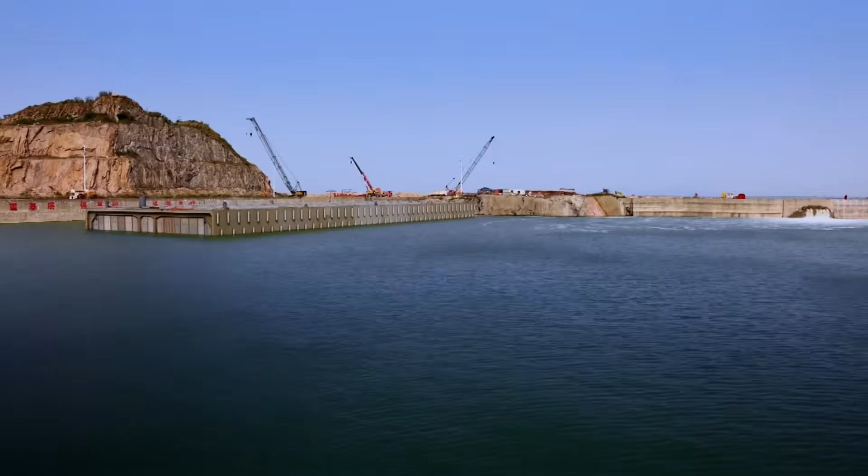When they leave the factory, each section weighs 80,000 tons, a colossal amount that would be extremely difficult to move by land. The engineers' strategy consists of using the estuary as a load-bearing element, because once temporarily closed at both ends, no matter their weight, these sections will float. Thanks to Archimedes, good old Archimedes.

So Archimedes states that a body immersed in water receives a thrust from this liquid in an upwards direction equal to the weight of the volume displaced. In short, Archimedes really means that the thrust of the water carries the load.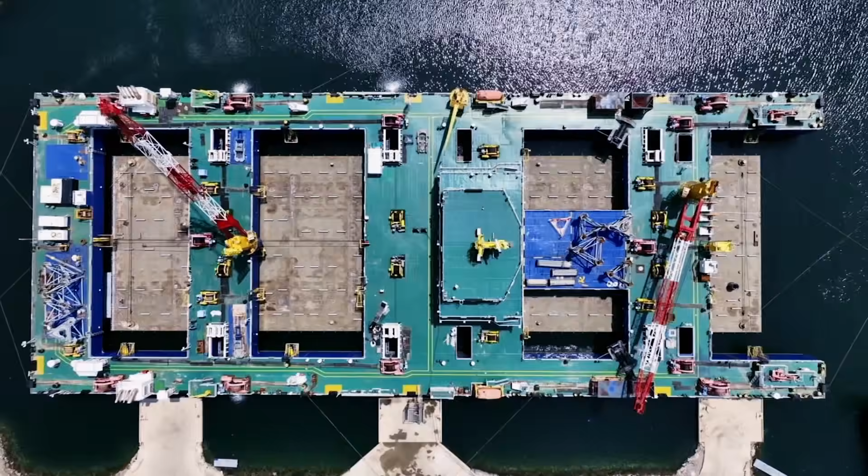To tow these heavy sections more than 50 kilometers away from the factory and safely across the Pearl River estuary, the Chinese engineers once again had to design a custom-made tool. The result was this super-equipped vessel, the first in the world to allow transport by flotation and the installation of immersed tunnel sections, designed and manufactured by the project's engineers in just 3 years.

Equipped with 2 main engines, 8 high-power lateral thrusters, and 158 real-time positioning sensors, this super-sized vessel is capable of towing the 80,000 tons of the immersed tube against wind and tide without deviating.

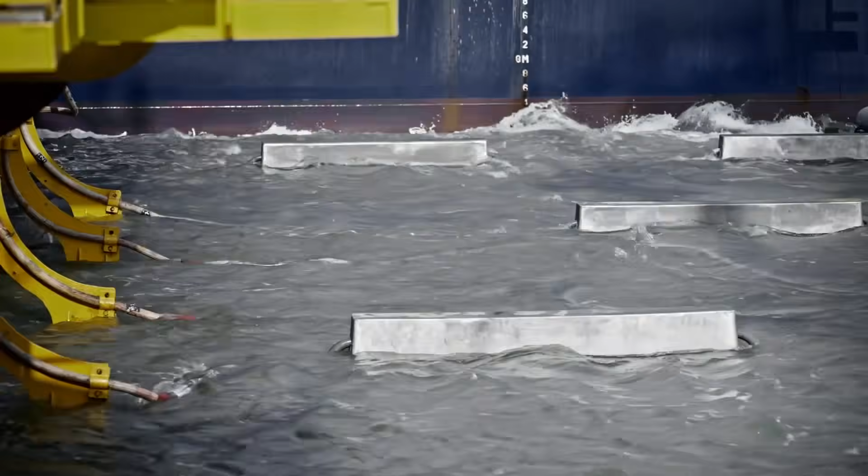Once again, the barge used to install the tunnel sections is a 2-in-1 device, if I can call it that, in that it allows the elements to be transported while keeping them as stable as possible, and at the same time to be placed gradually with the desired precision on the seabed.

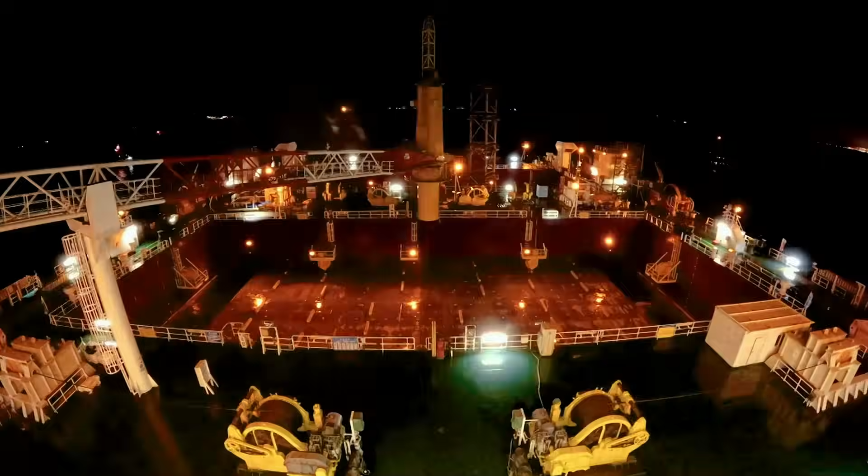Once on site, positioned above the tunnel trench, the section has to be sunk as quickly as possible. Because in the Lingding Channel, the weather and hydrographic conditions can change very quickly. This time, the immersion will take place at night. To all departments, descend over 5 meters at a speed of 0.3 meters a minute.

In the darkness of the night, Section E14 begins its descent towards the tunnel bed 40 meters below the ship. At this depth, it will have to be placed next to the previous section without hitting it. The operator's concentration is at its peak. It's a challenging task because everything takes place in the current, in water with limited visibility.

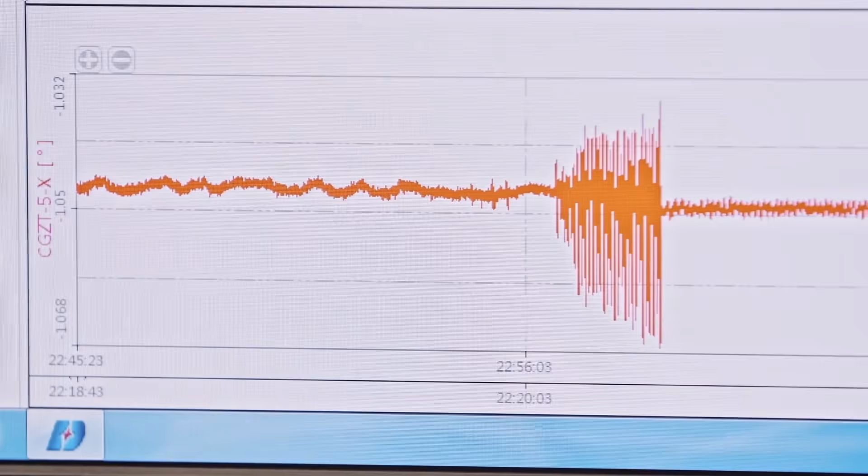It is extremely critical for the performance of the tunnel that each segment is installed within the given tolerances, because this is how it gets its water tightness, its performance, and long-term durability. The section is now less than 1 meter away from the seabed, but at this precise moment, the monitors go crazy. The sea currents are getting stronger and stronger, and the structure is feeling the effects.

The section shook violently, with a range of shaking and oscillation that reached 0.6 meters. If it is shaken again, it risks colliding with the section in front of it and damaging the most precious element, the seal, which would render this section unusable. The ship's captain and the engineer in charge of operations guide the operators to use the traction and reaction force of the cables to stabilize the section, balance it, and prevent any further oscillation.

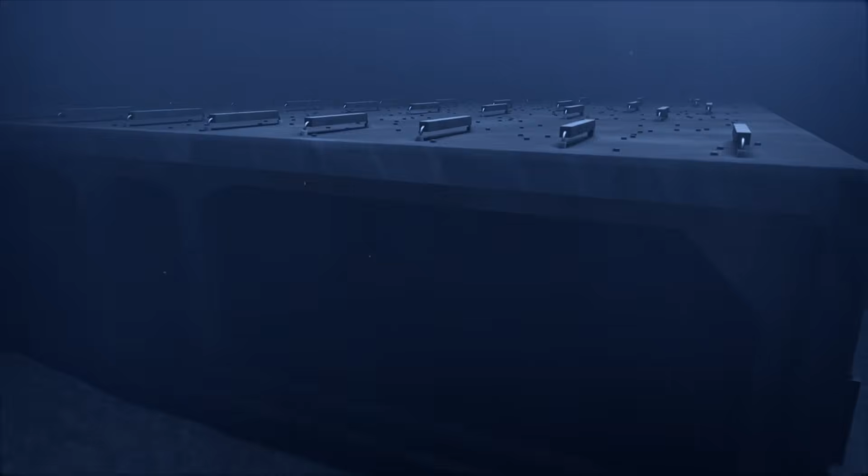Winch 1256, and again the 1278. By releasing and retracting the cables, centimeter by centimeter, the 5 operators managed to keep the section stable enough for it to land on the tunnel bed in the right position, and only 5 centimeters away from the previous section. This agonizing descent of only 80 centimeters will have taken more than an hour.

I was anxious and sleepy, but there was no other way. This work must be done step by step. Slow work produces meticulous work. At this point, the docking of the 2 sections is almost a formality. Thanks to a system of hydraulic jacks, tunnel section E13 finishes drawing in section E14, which this time joins with an offset of only 0.8 millimeters, giving the team a new record for precision.

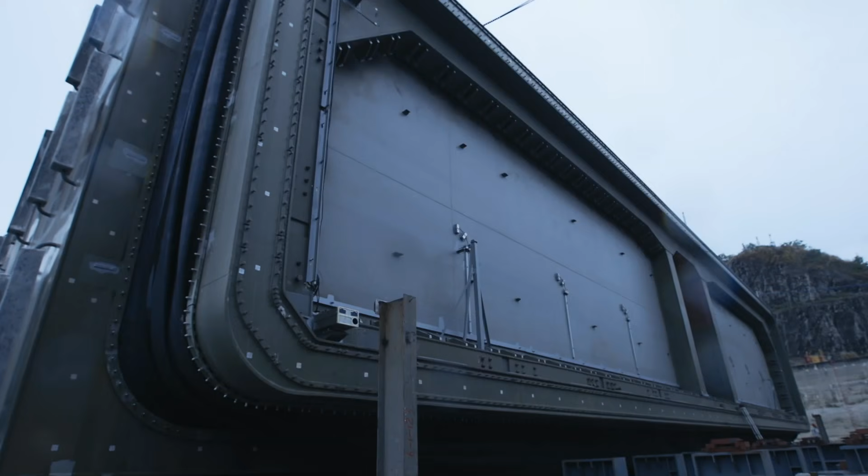In the following year, all of the tunnel sections are submerged and joined without difficulty. All except one. In June 2023, 165 meters of the section are still missing at the center of the future underwater highway. Section E23 is the last portion of the tunnel. It is also the one that integrates the final joint that will connect it to section E24, sealing the entire structure. This final component is a world first, because until now, underwater tunnels have been completed with an independent joint, separate from the other sections.

Here, the final joint is integrated into the last tunnel section, hidden inside the 165 meters like a drawer. Once the E23 section is in place, it will be pushed out. There can be no errors in the deployment of this final joint, at the risk of jeopardizing the water tightness of the tunnel. But it's a big challenge, because when the section is submerged at depth, it will be subjected to huge pressure from the seawater and resistance that will have to be overcome in order for the impressive 1,600-ton joint to be pushed out of the section.

The designers have therefore opted for an ingenious double push process. The first is exerted by hydraulic jacks, while the second is a push by water pressure. Inspired by the operation of a syringe to suck up liquid, the space located behind the final joint is connected to the sea. The injection of water inside the seal will thus compensate for the pressure exerted by the sea on the outside. Thanks to this technological innovation, 8 jacks will be enough to bring the final joint out of its hiding place. At this stage, the process is only a theory. It remains to be seen if, on D-Day, everything goes to plan.

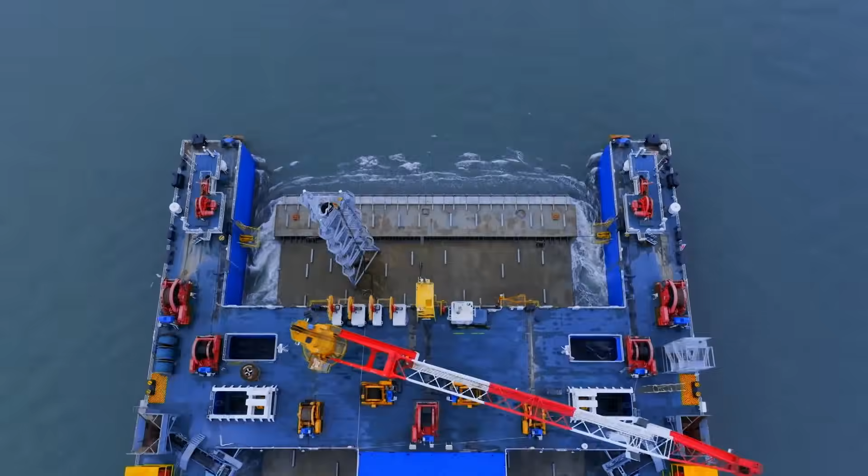On June the 9th, 2023, the transport and installation vessel begins its final crossing of the bay, towing the centerpiece of the Shenzhen Link. On board, the young engineer in charge of installing section E23 knows that the stakes are high, because this time, he has to place the last piece of the puzzle between 2 previously installed sections. The excess width on both sides is less than 80 centimeters, so we will be operating in a very narrow space. At the slightest abnormal underwater movement, the section will collide with the adjacent tunnel sections.

With their previous experience, the operators have acquired a particularly high level of coordination. Under the nevertheless worried gaze of their supervisors, they carry out this last descent with excellent control, placing the section on the tunnel bed with remarkable precision.

However, the team isn't claiming victory yet. Tomorrow, they have one last operation to complete, deploying and securing the final joint. If this step is completed successfully, these men will form part of the history of underwater tunnel construction. Their technological innovation is now taking its final test.

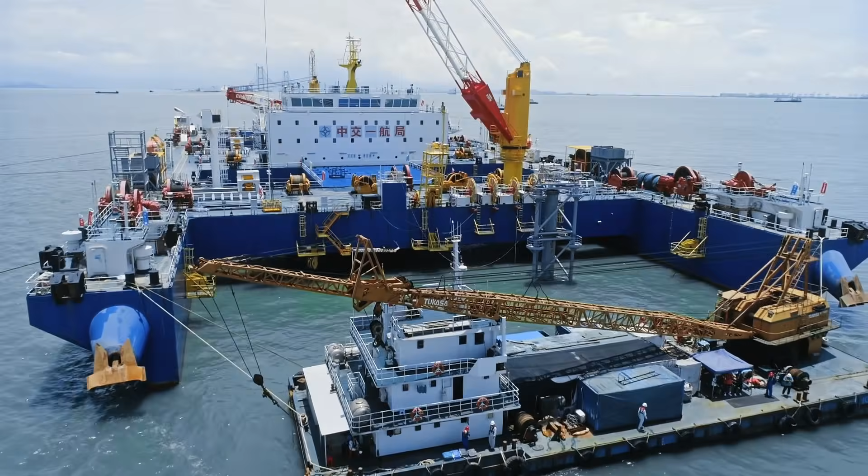First push distance of 3 centimeters. Push speed of 5 millimeters per minute. Start. At a depth of 27 meters, divers carefully monitor the proper deployment of the joint. Their mission, to alert the surface personnel to the slightest incident.

And from the first pushes, they report a worrying phenomenon. A bulge seems to be forming at the top of the final joint. Check the damaged area and determine its exact position. The operation is immediately stopped. The engineers hold their breath and analyze the situation in depth.

Since there's still air inside, the joint sometimes swells during the thrust. We finally understood that it's rather a good thing, because if it swells, it means that it's well sealed against air and water. No problem, we just need to regulate the thrust speed well. Resume a synchronous thrust of 13 centimeters.

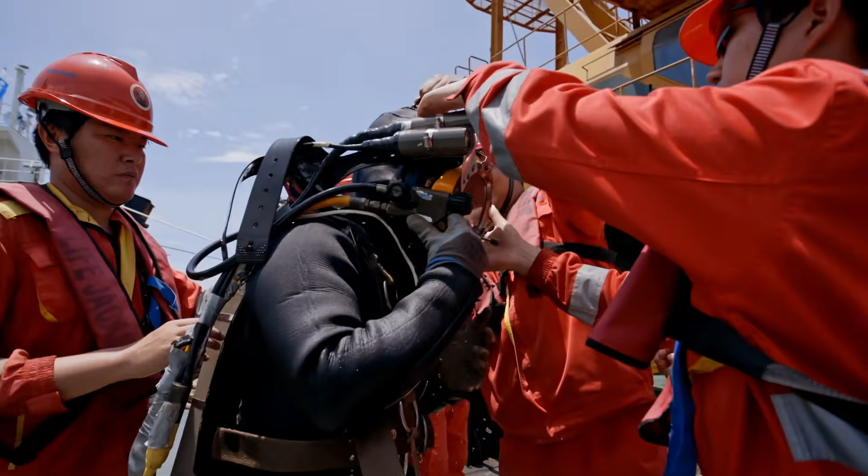When the joint is only 50 centimeters from section E24, the engineers carry out additional monitoring with an all-new measurement and control system. A binocular camera connected by a cable to the final joint. In real time, it provides the operators with remarkably precise docking data. Centimeter by centimeter, the builders' efforts are about to be rewarded. And after 13 hours of tension and painstaking work, the gamble pays off.

I'm happy to announce that the final operation has been successfully completed and that the Shenzhong Link tunnel is now fully connected. Thank you all. It was a great relief for the Chinese engineers, and at the same time, a source of pride. They invented something, they innovated, they succeeded. And I think it's an innovation that will be used again in the construction of this type of immersed tunnel.

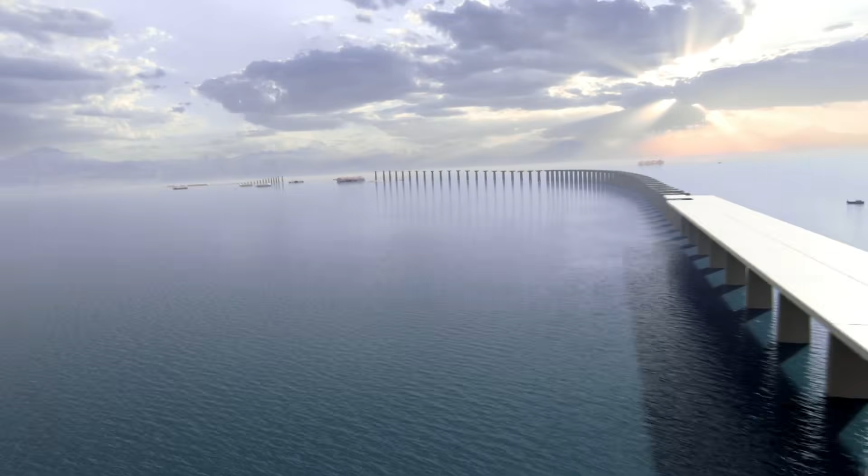7 years after the beginning of construction, 17 kilometers of bridges and nearly 7 kilometers of immersed tunnel have been connected, without the construction site being delayed by a single day. Innovation after innovation, record after record, this titanic project was an incredible technological and human adventure, making the dream of 15,000 builders come true.

Due to the scale of the Shenzhong Link, there have been a lot of innovations, and really the boundaries of technology have been pushed. New tools have been developed specialized to specific tasks. The high degree of automation and prefabrication, I think, will also set new standards. And that will go into the catalog of solutions that will be applied for future projects. I'm absolutely sure about that.

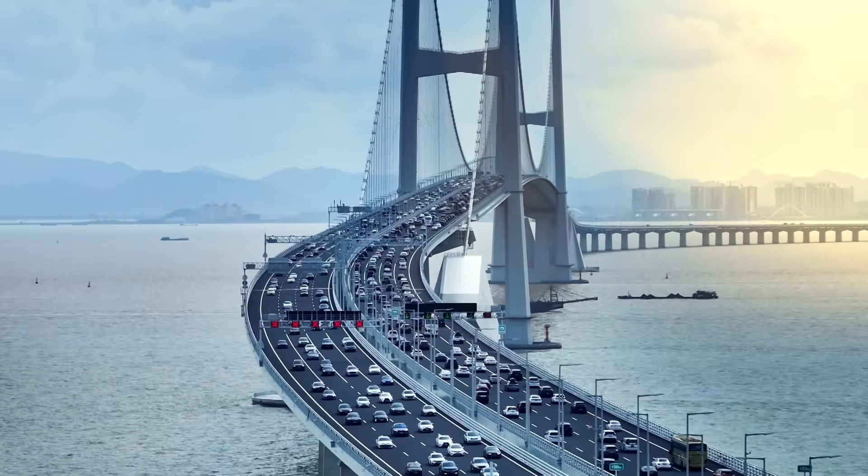On June 30th, 2024, the 24-kilometer Shenzhong Link was open to traffic. As planned, this trans-maritime highway is exceptionally wide, with 8 lanes upon which vehicles can travel at speeds of up to 100 kilometers an hour. It connects the city of Zhongshan to the city of Shenzhen in less than 30 minutes compared to 2 hours previously. And beyond its functional aspect, its elegant silhouette transforms this crossing into a real journey, a moment suspended in time.

The Shenzhong Link has already become a landmark for the region, and it makes me feel incredibly humble and proud of having been just a small part of it. We engineers spend a lot of time calculating and making drawings and analysis, but really the big reward is seeing our structure constructed and really coming to life. The daily use of this infrastructure by more than 100,000 vehicles will undoubtedly bring a new dynamic to the region's road network.

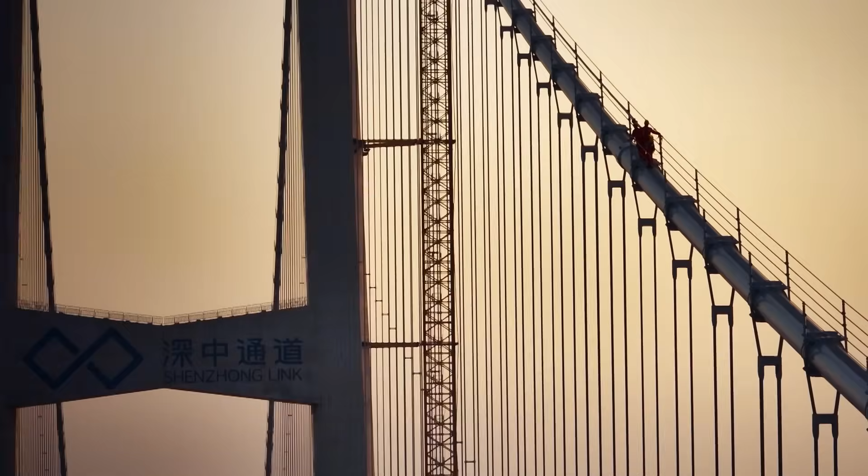On the seaside, prototypes of the container ships of the future are already passing easily under the world's highest maritime suspension bridge. Here, in order to pursue and intensify the economic and social development of the Greater Bay Area, the Chinese will have invested the equivalent of 5.7 billion euros, and above all, an impressive amount of sweat.

All major projects impress the world, but it has to be an opportunity, and in no case an unjustified desire to play to the gallery, as the saying goes. Here, there was a real need. They've built a remarkable and magnificent structure, and I believe they can be proud of it.

Much more than a simple highway, the Shenzhong Maritime Link is a dazzling and harmonious testimony to the ambition that brings people together. Its construction will leave its mark on the history of offshore construction, revealing the expertise of Chinese engineers and builders, and their constant capacity to adapt to the constraints and the excesses of the projects they have dreamed up.